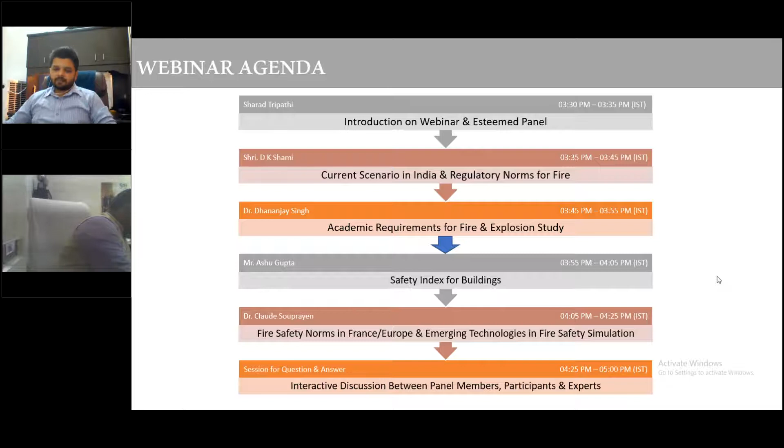For the last 2 years, I had been spending my time mostly in India, for one reason. And why I'm talking about this is the genesis of this webinar series also. We have been operating in China for the last 6-7 years, and we found that 3 years ago Chinese put an ultimatum to us that we should do development in China rather than working out of France or from India. And that was a kind of click, because I realized it's a pity that in India we are not putting emphasis on design.

Design is important not only for equipment, but also from a fire point of view, designing the building, designing the equipment, designing the safety. Depending on things which are coming from US, Norway, France, etc. really has no meaning. Things are usually 10 to 15 years behind the time. And if we really want to at least equal the Chinese, we have to adopt the same attitude, that self-dependence and independence should not be limited to make in India only.

It should first be designed in India, then only we can beat the Chinese and everyone else. So this webinar series is devoted not to the software, not to the applications, but to the technology, to the professors, to the students. We would like to engage them into new developments, into new research. Unfortunately, it is not going on at all in India.

Go to any IIT, you'll see that the numerical technology professors are practically absent. Everyone will talk of applications using the tools which are developed in US and elsewhere, but there is no motivation, no impetus, nothing is given by the industry.

So this webinar series was started essentially to bring the industry, to bring the students, and to bring the faculty on board, including Fluidyn. Right now we are working with French universities and academic institutions. We are financing PhDs. We would like to do the same thing in India.

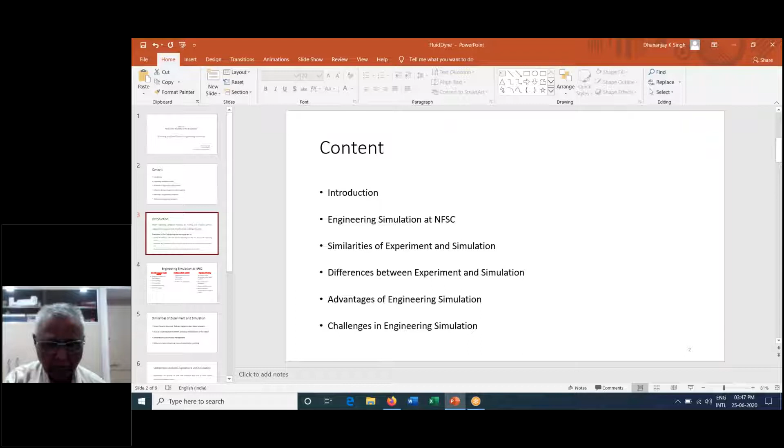Differences between experiment and simulation, advantages of engineering simulation, and the challenges which are present. My main focus is,

Yes. Now it is okay. Yeah. It is okay. Yeah. Please go ahead, Dr. Dhananjay.

So modern engineering workplaces commonly use modeling and simulation practices. Basically, here I am talking about the industry. Industries most of the time use computational tools for their analysis and design of systems.

For graduating engineers, NFSC mainly focuses on developing the techniques and skills of modern engineering by concentrating on identifying the problem, explaining what the problem consists of, and how they can apply the tools available to them to solve those problems. So basically, our main focus is on three things: identify, explain, and apply.

At NFSC, for engineering simulation, we have subjects like numerical methods for fire engineers, fire modeling, fire dynamics, structural fire safety, and fire risk analysis. These are the main core subjects which we are teaching here. Apart from that, NFSC has developed computational labs having 30 personal computers along with one workstation. NFSC has also purchased some software in which the students are given training.

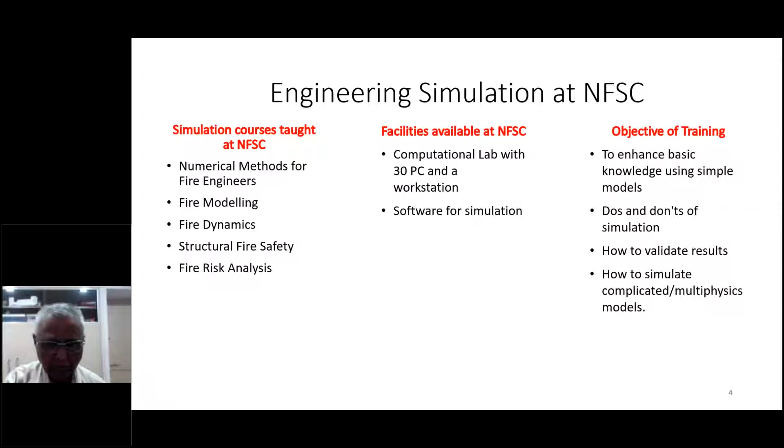Here multi-physics models means different types of problems, for example, an acoustic blast and how it is going to impact the structure. All those types of problems come under multi-physics models. Then the question arises, what is the similarity between experiment and simulation? Whatever results we get from the mathematical simulation, we can also get the same results from the experiment.

However, simulation we can do on computers, whereas experiments require a lot of facilities. Earlier, when computers were not developed, people relied on experiments. Now as personal computers developed and computing facilities were enhanced, people slowly shifted to simulation, and over the past decades, people have developed a lot of confidence in simulation.

So the first point is both experiment and simulation share the same structure, meaning both of them are in the same line. In this, we can also control the environment. For doing any experiment, we have to control the environment. Certain experiments require strict environmental control so that the results will be error free. The same thing can be done in mathematical modeling. Experiments and simulations are bound to have some error, so proper error management technique is also similar between the two.

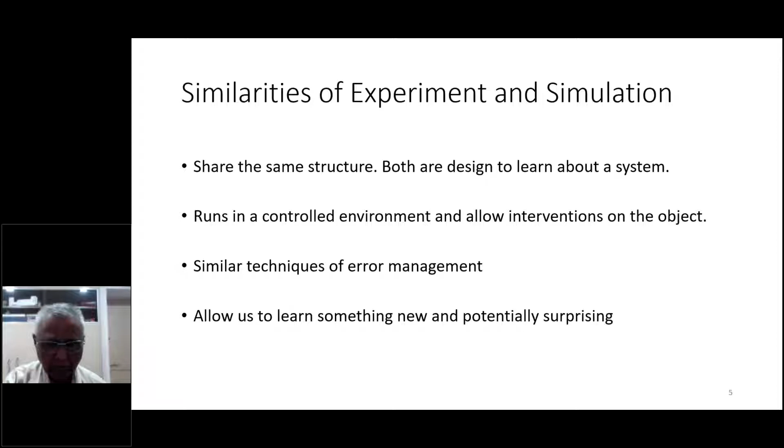We can also find some new or potentially surprising theory by using experiment and simulation. Then there are some differences between experiment and simulation. Experiments can provide us new empirical data, where computer simulation fails, because whatever computer simulations we do are backed by experiments so that we can match those results. But if you want to find new empirical data, in some cases computer simulation cannot help you in finding the empirical relationship.

Some experiments operate directly on the target system. For example, if you are testing a structural member, our target is to identify the fire resistance. So some experiments can directly act on the target system.

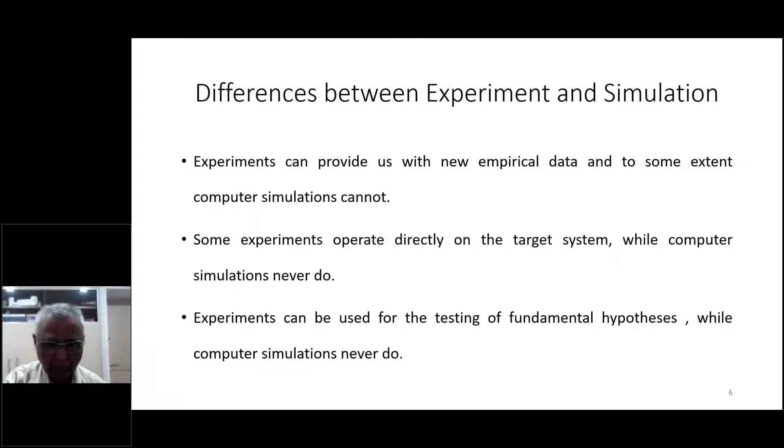Some computer models never do so. Experiments can be used for testing the fundamental hypothesis, whereas computer simulations never do.

Advantages of engineering simulation: it provides feedback while designing and analyzing the real world system. So before going for actual manufacturing of the particular structure or any system, we can do the analysis and design, and if we are confident that this is going to work, we can carry on with the design. So this is also a cost effective measure, which is the main advantage of using engineering simulation. It also permits the designer to solve a problem at different levels of abstraction.

In this, we can change the input data. We can see how the results are going to change. So basically, we call it the sensitivity study. Then simulation can also be used as an effective means for teaching or demonstrating the concept to the students.

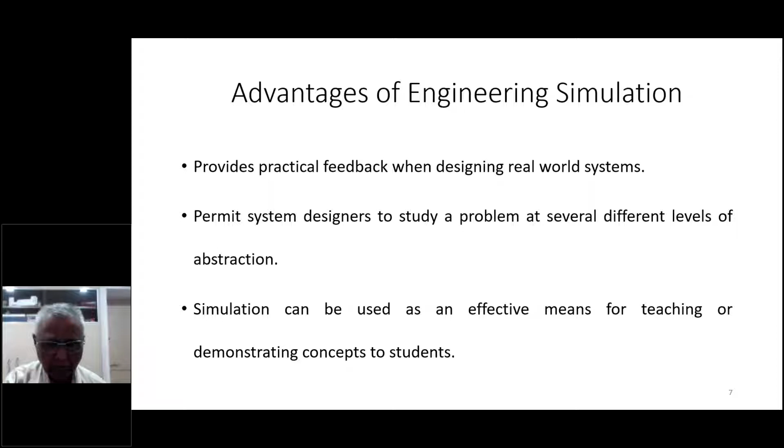The challenges in engineering simulation: it requires high expertise, because it's just like a double-edged sword. It is a boon to us also simultaneously. If it is used in the wrong way, it is going to give you a lot of problems, because the results will be meaningless, and ultimately at the end you will achieve a failure. So expertise is required to handle this engineering simulation.

Apart from that, high computing facilities are required, because if you want to analyze any dynamic system, it can take weeks also. So without high configuration computers, it is really difficult to get the solution. But we are fortunate that nowadays some companies are there who can share their servers at a small cost. So that is also an option which is available to us.

And sometimes simulation might not be realistic or reliable. So while using this engineering simulation, we have to be very cautious and always have a question mark on our results, so that wrong or meaningless results can be effectively filtered out, and at the end we'll get good and meaningful results, so that our end product or end output is error free.

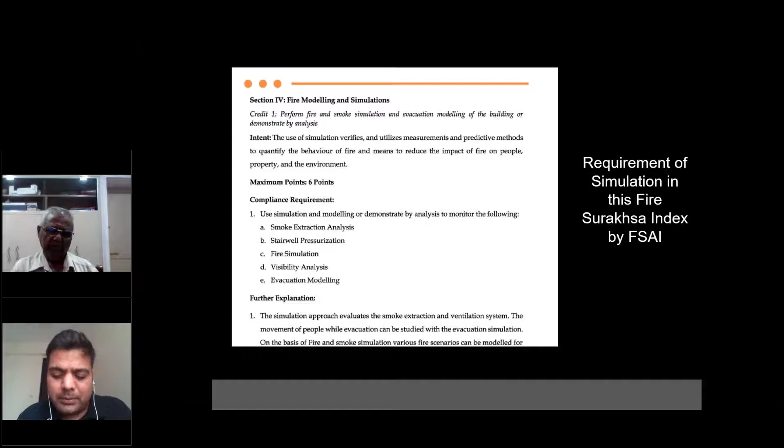They do fire evacuation modeling and fire smoke extraction analysis during the design concept. And if we use those concepts, it definitely adds a lot of value. So I'll give you some of the projects in India which I was involved in. Evacuation is very, very important.

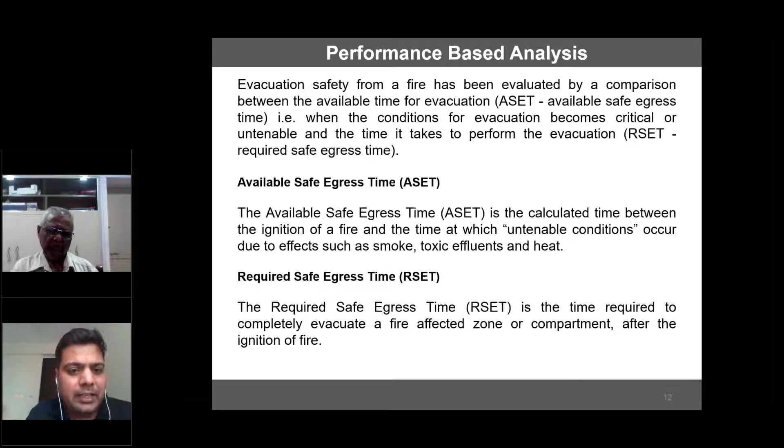When we say performance-based analysis, we have to calculate the ASET and RSET times, the available safe egress time and the required safe egress time. So what does that mean? This graph shows how the fire ignites, how we detect it, when the alarm is raised, and the recognition time, response time, and travel time. Then some margin of safety.

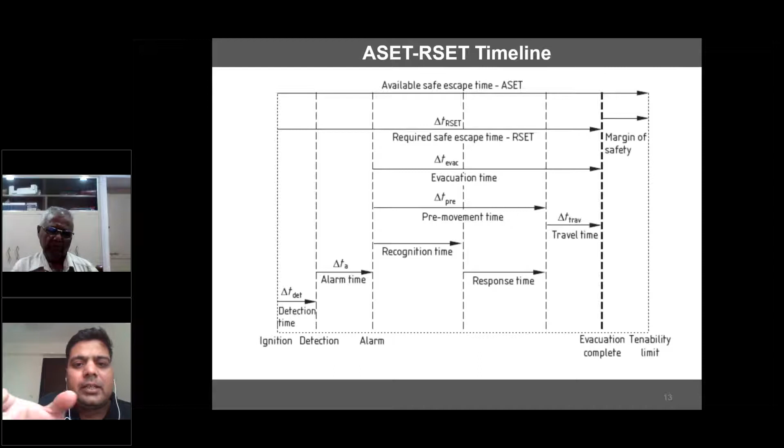The entire time is called the available safe escape time, ASET. And RSET, before the margin of safety, is the time to evacuate or escape the building, the required safe escape time. I have seen these kinds of studies proven because people applied the performance approach.

They look at visibility and temperature; of course, visibility is more important. If visibility drops below 10 meters, it is not safe, and we need to evacuate by that time. For this safe egress time, in some of the analysis we have done in some projects, the time coming out is 540.

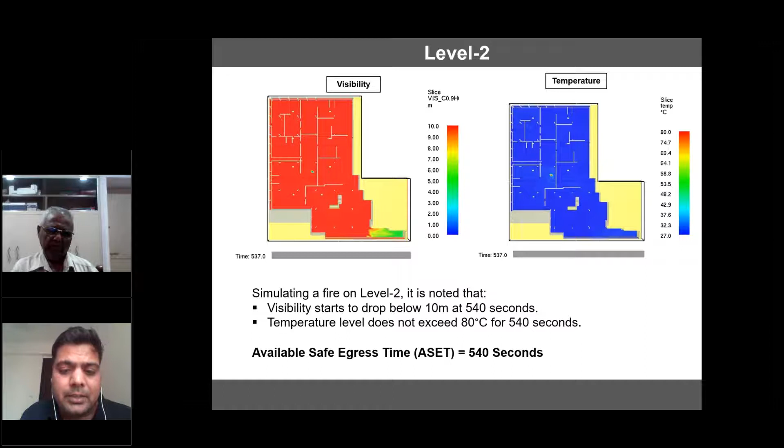This is the same project, level 1 and level 2 of the building, and we calculated that level 1 should be escaped in 780 seconds. We calculated this time with the help of simulation. There is nothing in the prescriptive approach which directly says this much time is required to evacuate. Generally we say some 10 or 12 minutes.

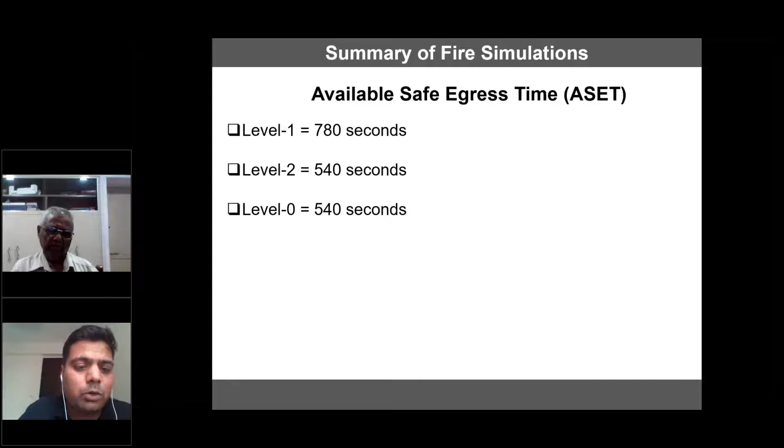But this exact number comes with the help of the simulation approach, the performance approach, because different kinds of building materials come up, affecting how the smoke will flow. Similarly, evacuation analysis is very, very important, because now we have several airports coming in India, several hospitals, and high-rise buildings are coming.

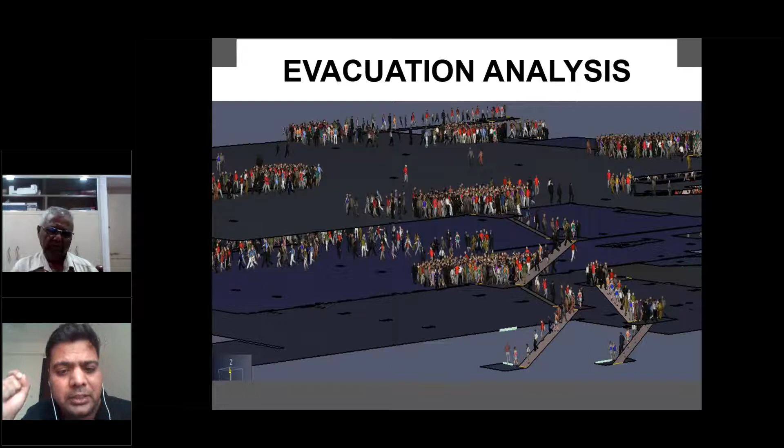Earlier we were making 10 floor, 12 floor buildings. Now we are talking about 100 floor or more than 100 floor buildings, and how people will evacuate if a fire happens. If we do this kind of analysis during the design of the project, it adds up a lot of value, which we have calculated.

So this is actually the prescriptive approach. I just want to explain the prescriptive and the performance approach. In the prescriptive approach, we have the National Building Code 2016 version, which is the latest one. And for performance, whatever we do, we follow the NFPA 101 concept. They have a requirement of total occupancy, and most of the time our fire officer always says we need to meet these numbers.

This is the maximum occupancy we can reach. But sometimes the client wants the occupancy to be higher. In that case, how can I prove that? This proof can happen because of fire evacuation modeling.

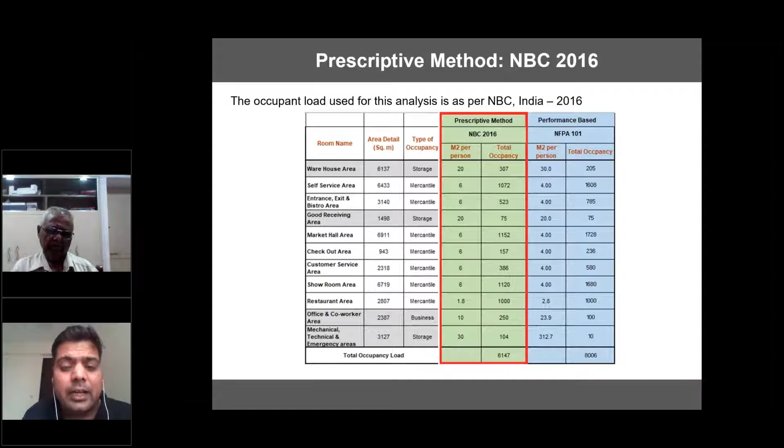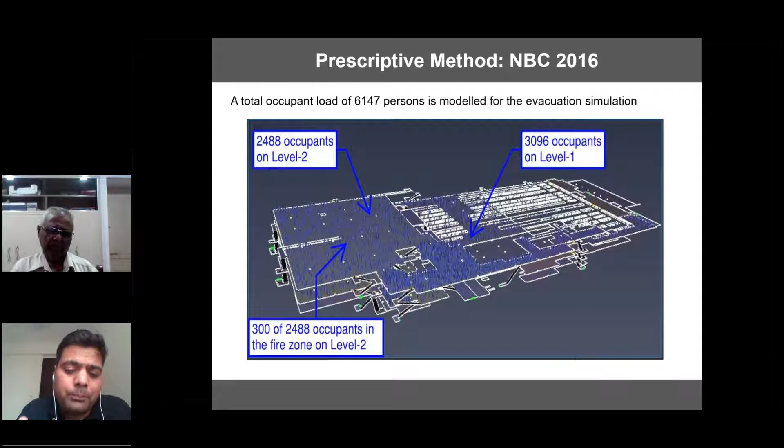We have seen this in one of the projects, an India project, in which as per the requirement of NBC, they can involve only 6,147 persons as per the requirement and evacuation time. So we calculated both the prescriptive and performance methods, and we calculated the evacuation time in that. Total occupancy, total occupant was 6,147 in the building.

This is the video, I'm not running it right now, but we calculated that if we go with the prescriptive method with NBC 2016, the 780 second is the maximum available safe egress time, but the required time was 340, 363, 375 seconds for the 6,000 people.

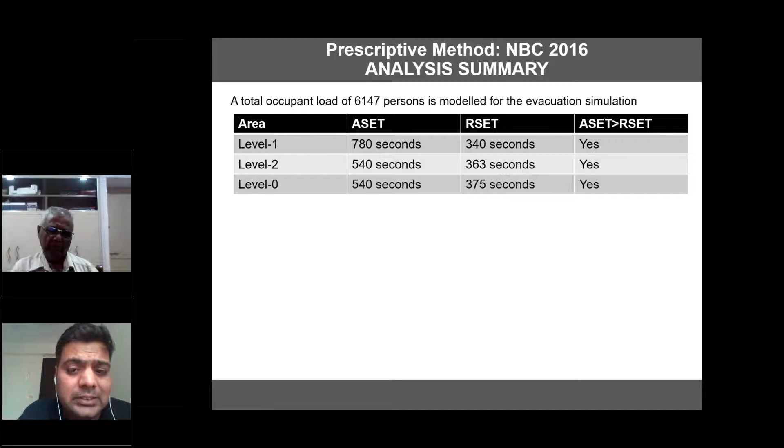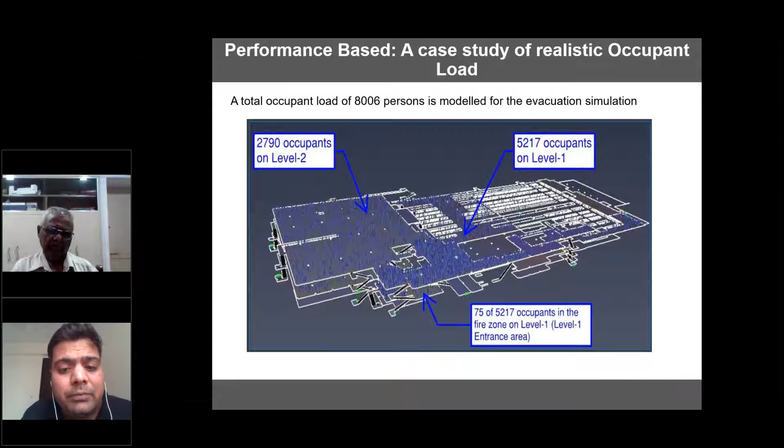And the client wants to increase this number. With the performance approach, if we go with that, the number can be 8,000 people. We did it with 8,000 people, so 8,000 people was involved, and we did the same analysis.

The maximum time was the same, but the RSET was 466, and it was coming in between the available time. We proved to the fire officer that this is happening, sir. Even with 8,000 people, we have enough time to evacuate. By the prescriptive method, there is no way to prove that, but with the performance approach, there is a way to prove that, and people are doing it.

But still in India, there is no provision for the performance approach. Being a building expert, I do similar work in the energy sector also. Ten years back, energy simulation was not a concept in India. People were always talking about the material they needed to procure, but the concept has changed. Now people understand the value of simulation during the design process.

We saved a lot of money, but here the cost is not money, it is the cost of human life, because if we save one life, it gives a lot of value to the simulation. My presentation was just a basic cover, but FSAI, the Fire and Security Association, is doing a lot of effort to develop this, and we want people in this area to please come forward as volunteers, because we are trying to develop something for the government so that if this follows, it will definitely become part of the building regulation. Thank you so much for the time.

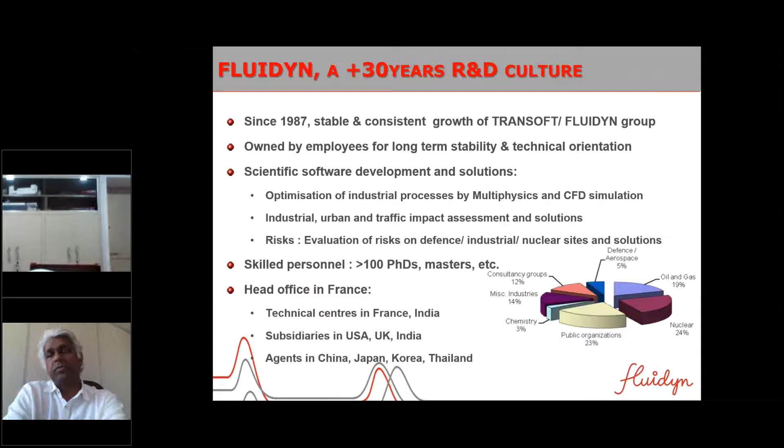And the other activity is about consultancy jobs, and this is where a large part of expertise is built, always and very often, with respect to regulations requirements for industries.

I have a few slides of introduction just to overview and complement what has been expressed in terms of fire activities and fire safety applied to public buildings and malls and so on. I will focus in this presentation on industries, which is slightly different, even though most of the scenarios look similar. Objectives for smoke evacuation, temperature load are similar. The responses are not exactly the same.

In this slide, you can see basically what are the phenomena and effects at play and what we are looking for when producing the risk assessment for fires. Most fires, or all fires, are combustion of gases, gas mixture. Indeed, even solid fires and liquid fires are starting with decomposition, fusion, evaporation, pyrolysis, which produces the gases, and flames is basically a gas phase combustion system.

What we'll be looking at more specifically is thermal fluxes on the environment, looking for damages, losses on structures and assets, injury to people, both on-site and off-site, when talking about industries. The other issues, of course, are toxic byproducts from the combustion, loss of visibility, and ultimately pollution of mainly water and soils via the wastewater.

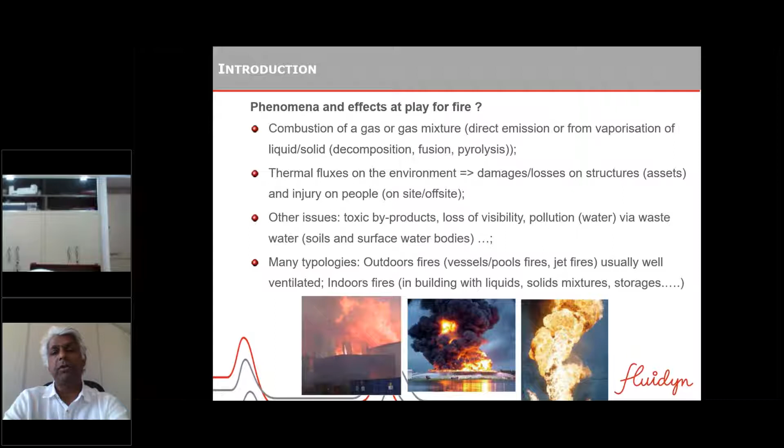If we look at short range, when making modeling and assessing the power, which is the very first ingredient for the assessment of the risk, most of the power is from heat transfer, radiative and convection, from burned gases and soot. Everything is at high temperature, including burning char, which can be inside the smoke. Radiation at short range means few meters away from the source.

And this is important for propagation of the fire. One usual issue about fire is assessing which part goes to convection, which might reach long-range distances, and which part goes to radiation. The sketch you can see here is basically the typical shape and zones in the fires, and the way the energy from the fires goes outside from the source terms and the fire region. You also have a few examples of the order of magnitude of temperature which are reached at the fire short-range domain.

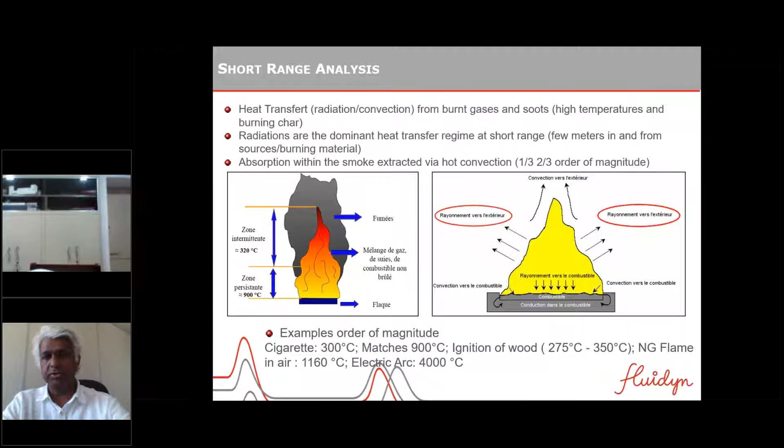Now, looking at the regulations and the several aspects with respect to the risk assessment, evacuation is of course something for people, specifically for places where the general public is operating and located.

But in industries and in the design of buildings and infrastructure, resistance to fire is something which is important. And from the regulation point of view, there are classifications of structures and materials with the level of resistance.

In France and Europe, 3 letters characterize the resistance to fire: R, E, and I, for resistance, air tightness, and insulation. The second item is about reaction to fire.

It comes to see whether some materials have the potential to feed the fire during degradation or decomposition, and to enhance the development and propagation of the fire.

So it can be droplets, can be debris, and the European classification, you can see examples given here, also includes indices for smoke opacity, and this potential production of droplets and debris from the decomposition of the materials. So you see examples of classification: SF, PF, CF for the materials.

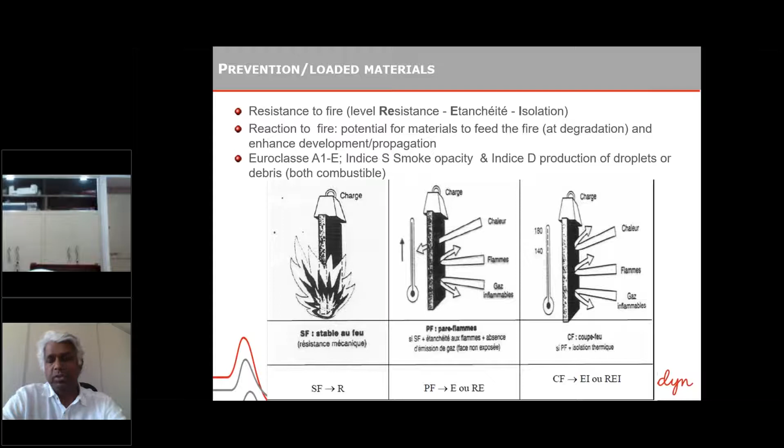When talking about regulation, the protection of people and structures all comes down to thermal effects, both for continuous long duration exposure, which is different from explosion, where you have short duration pressure blast and pressure effects on people, assets, and structure. For fires, basically you also have orders of magnitude of fluxes and typical effects that can be produced by those fluxes.

The yellow ones are the thresholds for effects in kilowatts per square meter. For irreversible effect, which is 3 kilowatts per square meter, it is for fires of duration larger than 1 to 2 minutes.

The second one is 5 kilowatts per square meter for the first lethal effect, again same duration for fires. 8 kilowatts per square meter is for significant lethal effects.

And you also have ideas about domino effects and propagation at 8 kilowatts per square meter. You have spontaneous combustion of woods and paints, and in some situations, propagation to other hazardous reservoir materials which are on the assets.

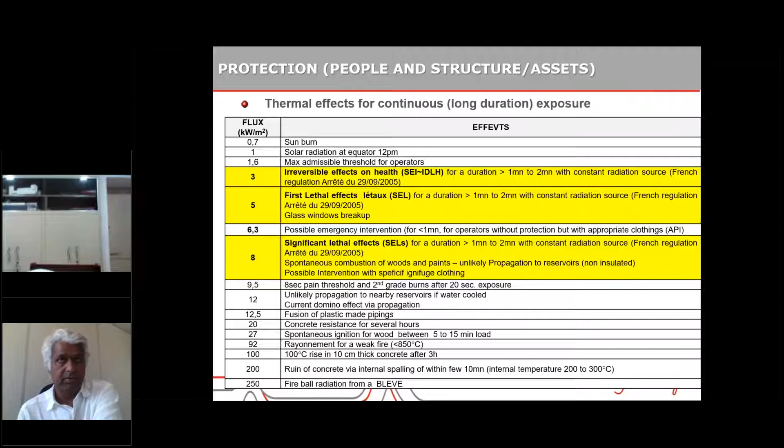So based on those regulations, I should emphasize that in France, there are 2 bodies of regulations. One which is under the control and changing and improvement by the French Ministry of Environment, which is handling both the industries and energy.

And the regulations are based on the classification of activities. ICPE means classified installations, Seveso, large industrial sites with major hazardous risk, and nuclear. And you can have a few examples of classification.

1510 is for warehouses. The other one is for flammable reservoirs and flammable liquids. So it amounts to the analysis of oil and gas depots and farms.

The other one is for waste and recycling, where you have accumulation and storage, including processes of waste, where paper, paperboard, wood, electrical equipment can be located.

So for those kinds of regulations for industries, they impose strict application for design, inspection, and of course risk analysis, for prevention, protection, and in the risk analysis and QRA, quantitative risk assessment, looking for consequence modeling for fire, for propagation, for assets and structural collapse, for operators' safety and evacuations, and ultimately for environmental impact, pollution, smoke, and so on.

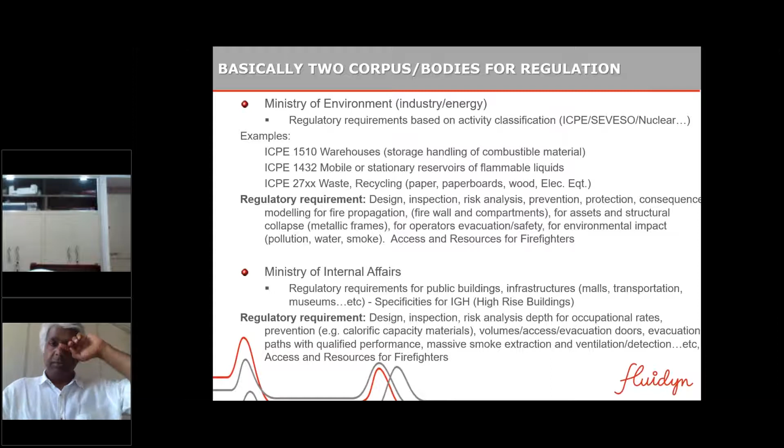So the other body is about the Ministry of Internal Affairs. It's handling mainly public buildings, infrastructure welcoming the general public, malls, transportation infrastructure, museums, and so on, with very specific requirements for immeubles de grande hauteur, which are high-rise buildings, where the requirements are much more strict for structural analysis, for evacuations, ventilation, massive smoke extraction.

And in that case, the regulation requirement is about design, inspection, risk analysis for complexity depending on the occupational rates, for the number of people to be evacuated in short durations.

Prevention, looking for removing any high calorific capacity material that can produce high energy fires. Design for the volumes, for the access and evacuation doors, for dimensions, path, and qualified performance, meaning that for various fire scenarios, the performance of the systems, both for smoke evacuation and for people evacuation, has to be qualified.

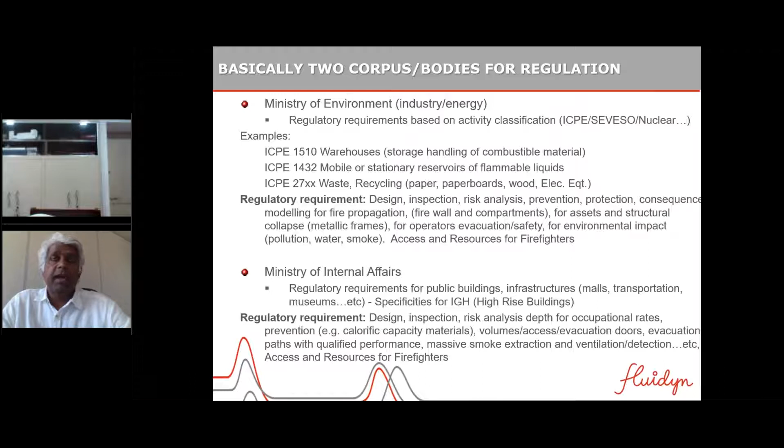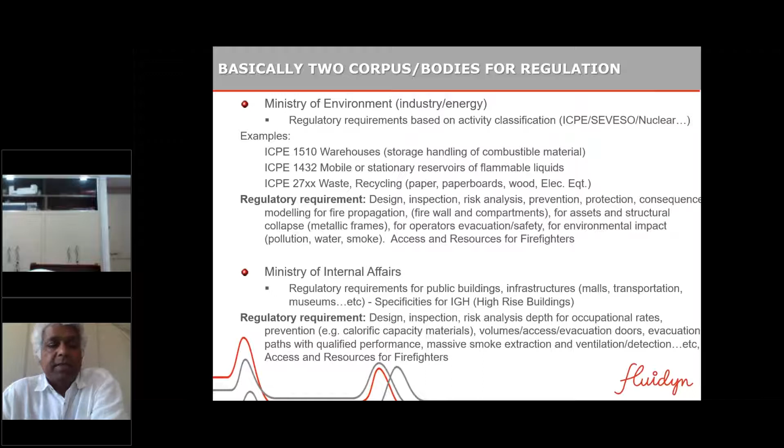Again, in these requirements for infrastructure and public buildings, there is a need for access and resources for firefighters. So at Fluidyn, we try to develop approaches and specific software to propose solutions with increasing complexities. Some are for dimensioning designs, others for more complex situations like transient fire propagation and evacuation issues. So Ventfire is one of the solutions developed in India by our Bangalore team for assessing transient cases.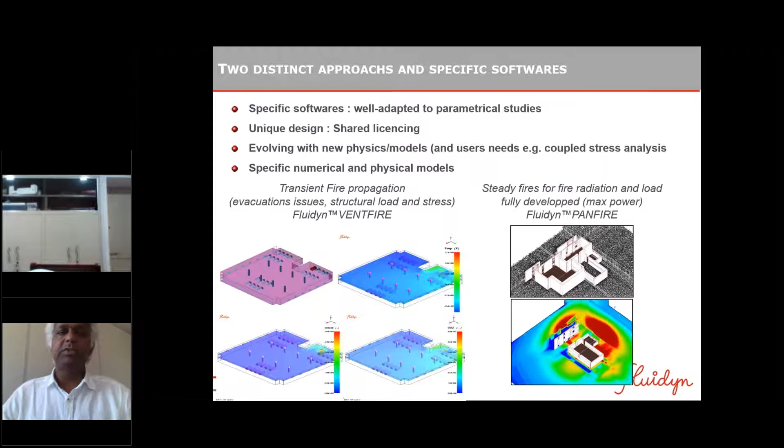So this quick design engineering solution is very helpful to assess the layout of the plant and to see whether various mitigations might be efficient to reduce the impact.

This application, PanFire, uses solid flame models, which basically rely on empirical correlations for the flame height of the fire. Two important parameters are the flame geometry and flame emissive power, which is a very robust way to describe things like pool fires, jet fires, and so on.

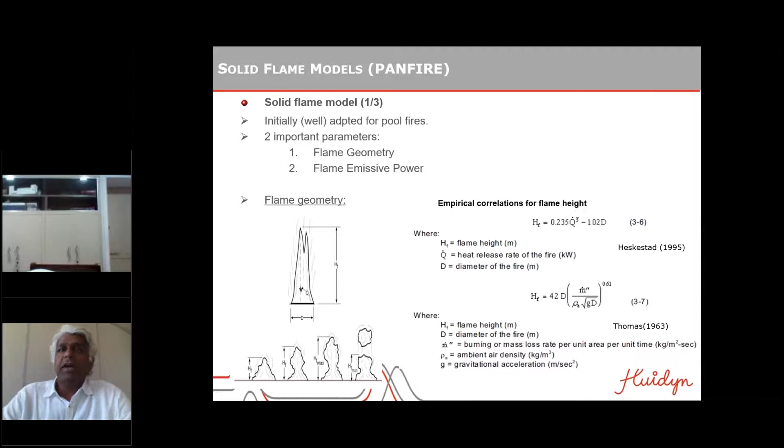And when looking at more complex fire cases, for example for storage, it also takes into account how the storage is assembled. You see on the sketch here an example of combustible material assemblies, and the combustion rates, which is one of the first important parameters for solid flame models, will also depend on the assembly of that storage.

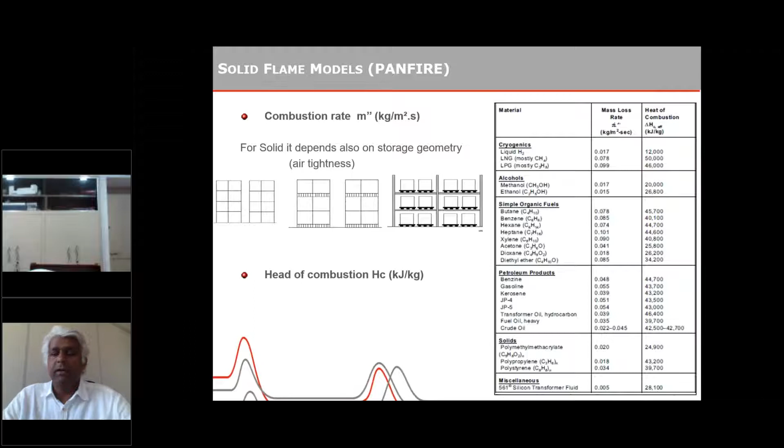The second parameter is the heat of combustion and the radiation at the flame. So the flame emissive power in solid flame models relies basically on estimates from experimental data for various burning materials. Based on the surface heat release rate, we can estimate the solid flame model.

In this specific tool, Fluidyn PanFire, we can estimate the surface heat radiation part of the combustion power. You have an example here of typical heat release rates for various burning materials.

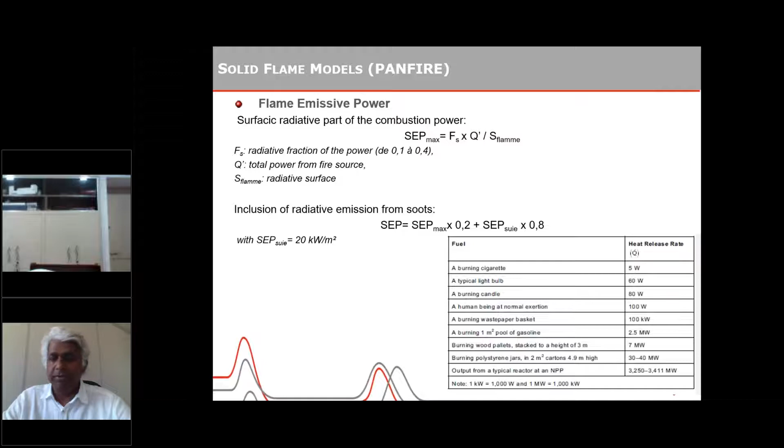Can you see this presentation? This conference will now be recorded. Yeah Claude, continue. Okay, alright. Please do not record because there are interruptions. We'll send you the slides later. Claude, you should close it in the next 10 minutes, not more.

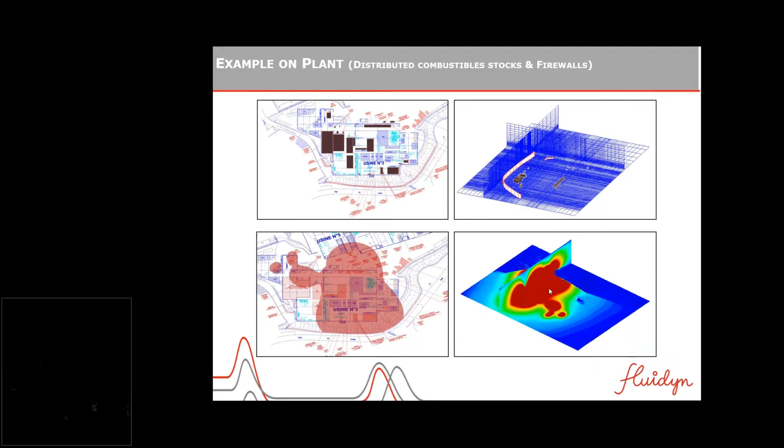In addition, the materials are defined in different classes.

There is also compressed gases being stored, and inside the buildings we are using these compressed gases, the liquefied gases, and a lot of hazardous materials.

So the way we go about it is first laying out the safety distances so that we are segregating the flame proof and non-flame proof areas. And while the plants are being built, the process is designed in such a way that we identify where the hazardous operations are, and certain instrumentation is built in so that it takes care of this.

But still, we have not had any experience of any explosions, except one where there was a dust explosion, but we had designed it in such a way that in case of that dust explosion, it should be vented outside, and it worked that way.

And then sometimes we come across experiences where we have to design pressure vessels where hydrogenation is taking place, and these hydrogenators, if the operators make any mistake, you can have an explosion of a pressure vessel inside a building. So what we do, as a standard practice, is develop the location of the pressure vessel in such a way that the explosion can go upward and outward and not bring down the building.

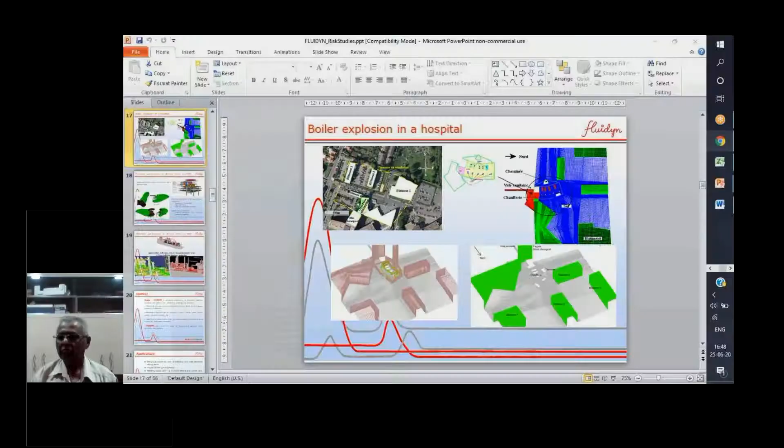Thank you very much. Shamiji, there is another question from Larsen and Toubro, Mr. Bashram Govindam, which is of a similar nature, on deflagration. Mr. Govindam, are you there? Yes, sir. So can I ask my question? Yes, please go ahead.

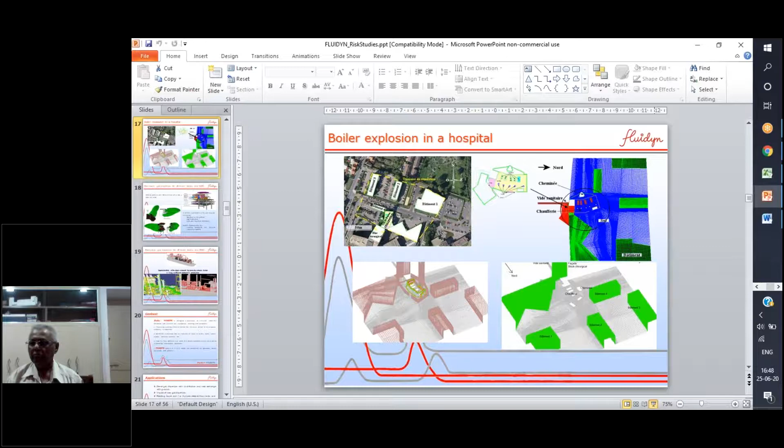So we were in a project where we had to evaluate what would be the effect of deflagration of a low hydrocarbon in air, and whether we should design our equipment for such a high pressure which comes after the explosion. We built a 1D model, but my question is regarding the 3D simulation models that have been done using very realistic simulations like CFD, the very detailed model that you have shown.

How does it differ from the usual 1D graph which is obtained from literature, and how does it compare with that? Is there any substantial difference in the pressure which we get, because our values are very closely correlating with NFPA values? So I'm just asking how different that could be.

And my second question regarding the same thing is, would it be possible to design a very complex geometry in the software? I think it should be, but for deflagration, would it be possible for a particular composition to have such a small transient variation in Fluidyn? So those are my two questions.

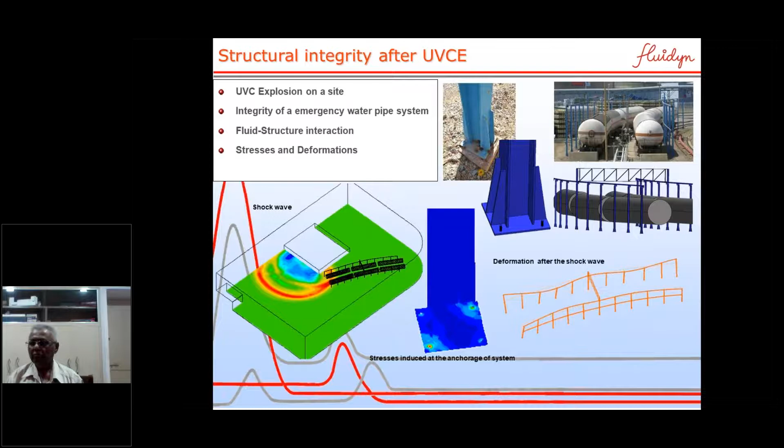Okay, I can answer the questions about the comparisons. 1D or 2D models are usually applying TNT equivalent curves based on the initial energy which is available, whatever the dimension of the vessels, the dimension of the cloud, or the property of the explosive material. It gives a value as a function of distance, how the pressure is decreasing.

And of course, those 1D or 2D models are very good first screening tools, but they are not using at all the exact design of the plant. So it is flat terrain without obstacles, without bouncing of the pressure and so on. And therefore, it is quite difficult to assess which one to compare, in fact.

But of course, the better you describe the site, the better you describe the process of the explosion itself, either by solving the turbulence and combustion models for the deflagration of a gas, or the exact geometry of the reservoir for a pneumatic explosion, for example, it will always be a much better description of the way the pressure is propagating away, bouncing and being reflected, and how the mitigation can operate and what the performance of the mitigation systems is.

So somehow 1D or 2D models which are using abacus or analytical formulations are very useful for very first screening. But if you look at the distance at risk for even a very small reservoir, you'll end up with a very long distance, which is quite annoying in terms of implementation of the layout of the plant, and also may refer to far too conservative distance regulations to build nearby buildings, nearby industries, and so on.

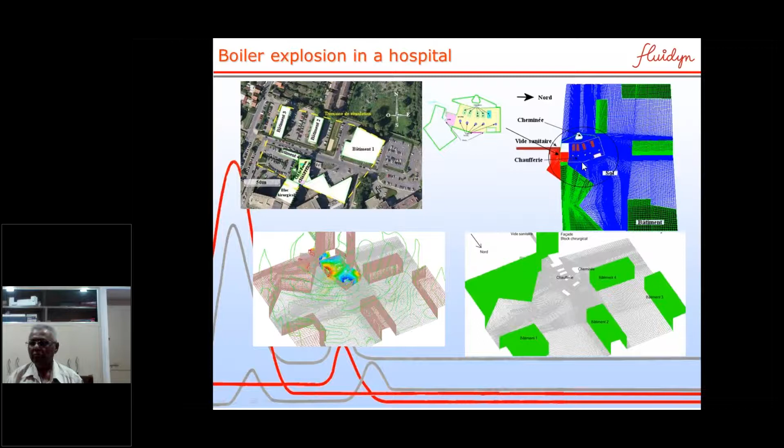fueled systems, and the design helps to tell what the surface for the vent holes should be. Are they good enough? In case the geometry is not allowing analytical or empirical formulations to be employed. And also it produces the exact distance at risk outside.

I would also like to point out that very often most of the designs are done keeping deflagration in mind, subsonic explosion. But when the explosion is confined, it may turn into detonation, which is much more deadly. Things like Buncefield also happened because of the accumulation of droplets, aerosol in the air.

So subsonic explosion, making estimations like 120 millibars as the maximum pressure, etc., is really not valid. In most cases, for the tools which were using that kind of number, in real life explosions the pressures reached were much higher.

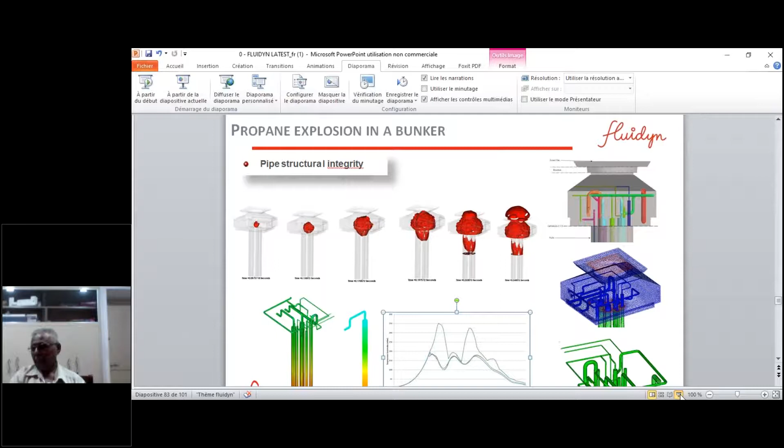Mainly, it was a discussion of the design parameters and the design basis to be inducted during the design stage itself in the building structures. My question was, we are in the petrochemical business, so this simulation or early detection with respect to some release sources, are you working on that? That was my question.

I think I'll take that question partially before handing it over to my colleagues. We started working on early detection for terrorist attacks in early 2000. For almost 10-15 years, it was under wraps because of its sensitive nature. Those things were not allowed, you see. And that is where designing and in-house development in the country is very important. Mr. Ghosh, you would have been already using these tools some 15 years ago if these things were being developed in our IITs.

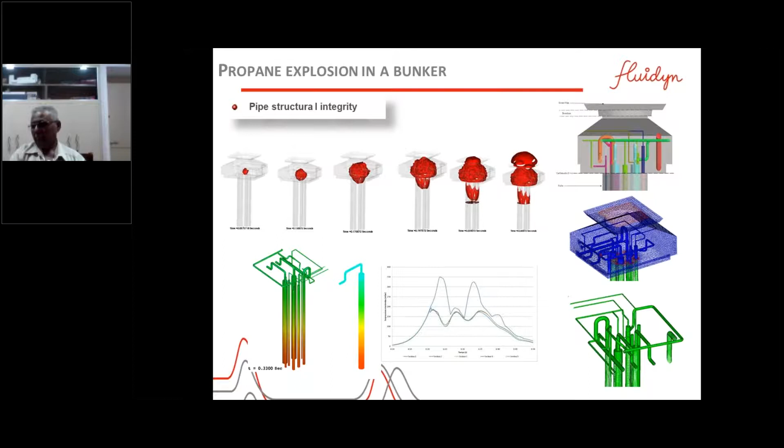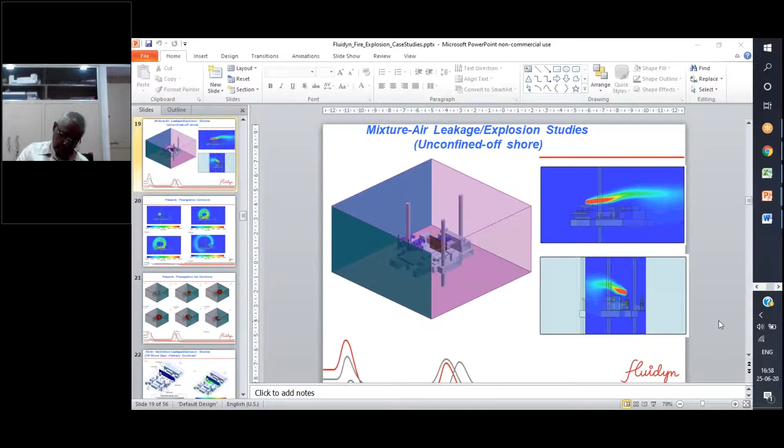So of course, when you have no leaks, there is no need for any action. But as soon as those maps are pointing to some leak locations, there is room for action, and this avoids the accumulation of flammable material on the plant, at the process, or outdoors, outside the property limits.

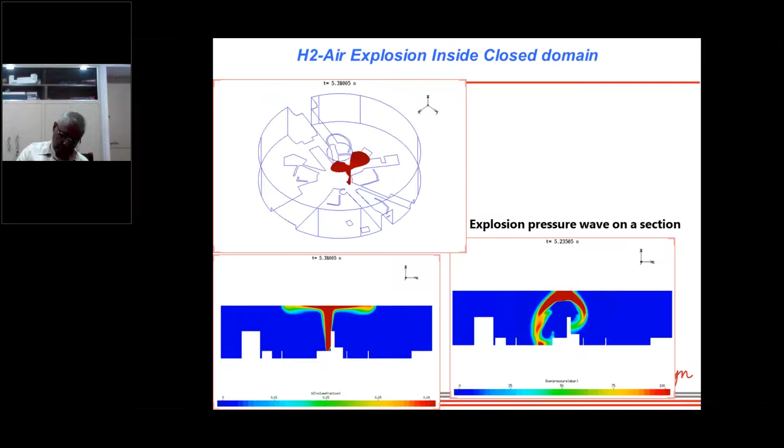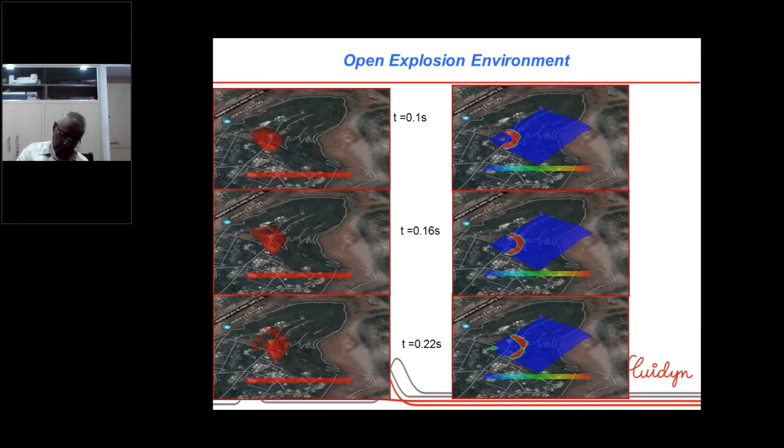Dr. Chandan Ghosh, wow, he is a professor who introduced me to Dr. Sharad. Thank you, Dr. Chandan, for all your good work. And I think since then we are progressing ahead. And you are in fact the person who started the ball rolling in India, and I tried to help you out. So thank you for joining with us.

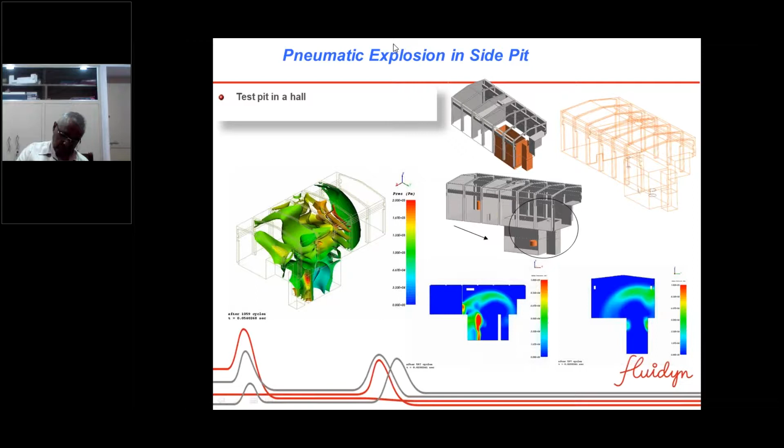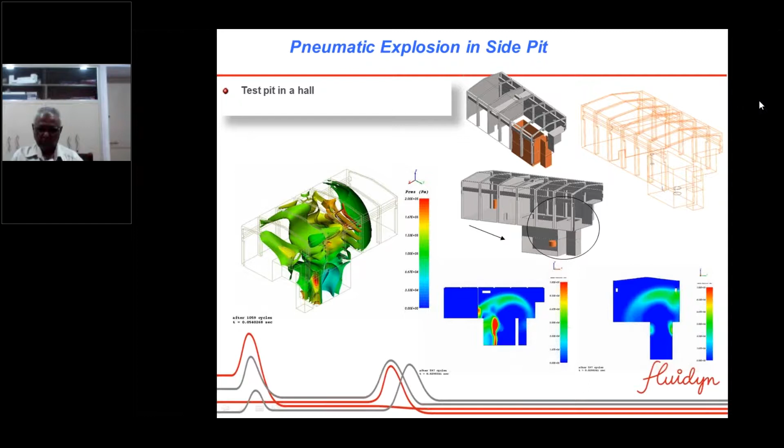I don't have much question other than only one. This is a challenge to all the technocrats who are attending this session: how and when you will give me the pocket-friendly version of your technology, so that I, as a fire advisor, can ask all my firefighters to put it inside their computer and do the rest of the work before issuing the NOC.

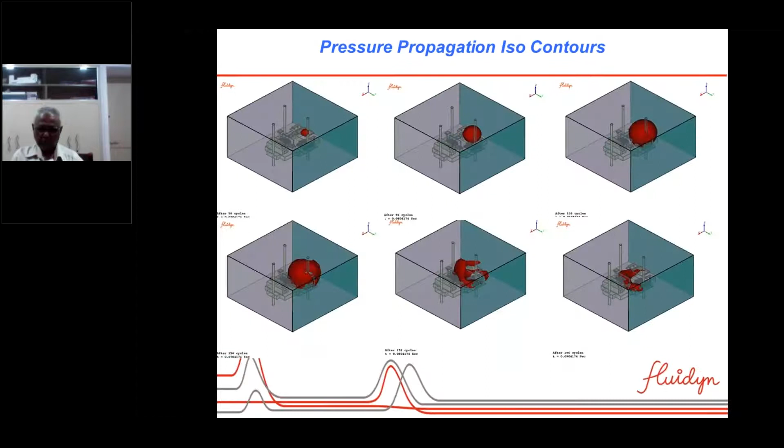So my question, since Sharad, you are there, I know you. I just want to know when you will provide us the pocket-friendly version of your rich technology, so that each of my firemen can install it in his own computer without depending much on the cost part of it. I mean, a bigger server, or the continual upgradation of software or something like that. Sharad, over to you, please.

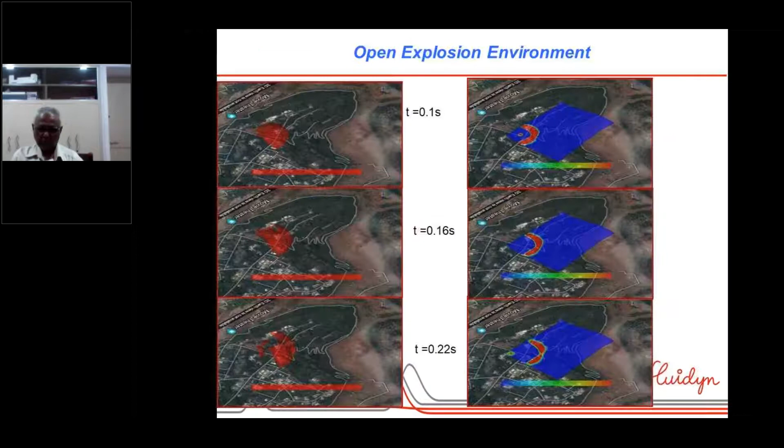Can you answer me? Swamiji, thank you very much, especially for attending and the encouraging words. In fact, you have taken the words out of my mouth. After 50 years of life here, all that I am looking for is that whatever is being developed in Europe should be developed in India. It should be at Indian cost. It should be done by Indian engineers who can earn a good living without having to go to the US and elsewhere.

If we start developing things in India, I'm sure, like the general IT industry, which was based on low-cost labor, it should be based on a high-cost, high-technology base, and we can export the same things to China and elsewhere. Our technology is being used by the Chinese. The Chinese are pressurizing us to do development there. We are not getting encouragement in India.

Your question about a pocket size limited to the money available in Indian pockets can be developed only if the Indian industry rises up to it, encourages the developments in Indian institutions, encourages the development in IITs, and stops looking for technology which is 10, 15 years old coming from the Western world.

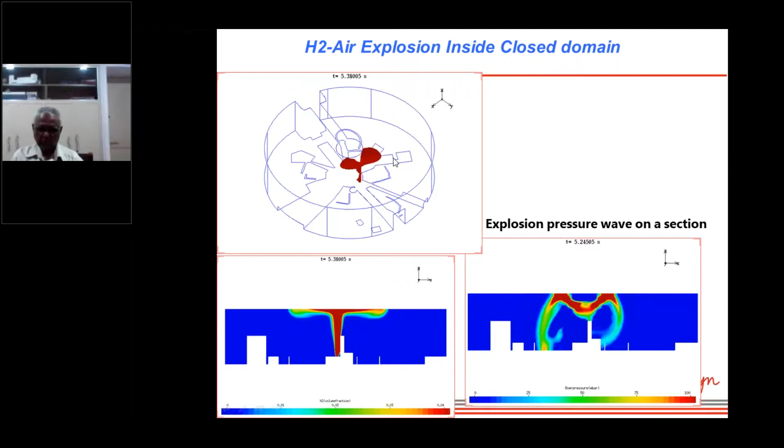So I would rather thank every one of you. It is very, very kind of you. I'm sure this kind of thing will go down to our young generation, and hopefully they will come forward and probably support our endeavor in future.

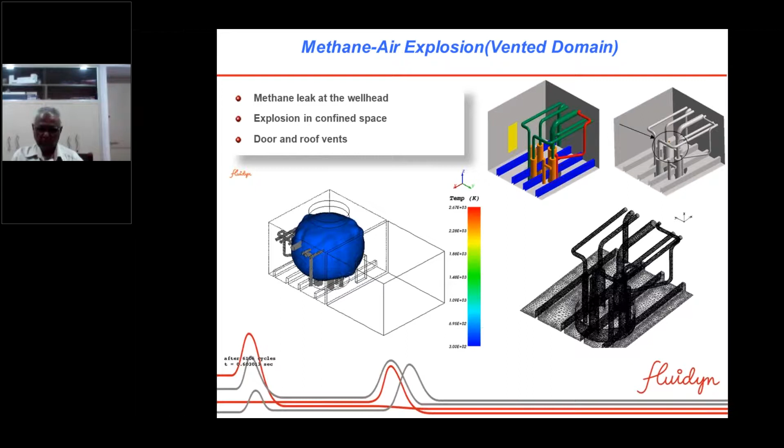I think we'll work on it. We are working on it. And cost is not the answer. The answer is in the technology, sir. We will do everything for that. Thank you, Dr. Dhananjay. Please take this as a challenge and try to encourage your boys to do something for us and use the available technology and come out with whatever is required for the country.

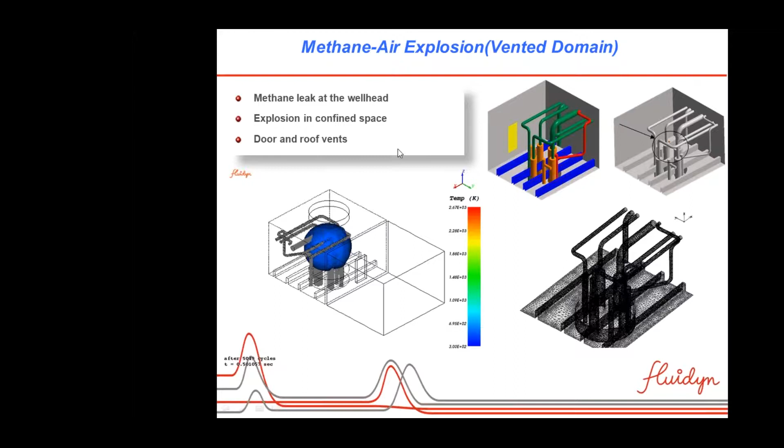So the other thing I would like to know from these eminent participants: since I have introduced this performance-based fire design in one of the courses being run by the IP University, I want a number of you volunteers who can teach this particular section of the syllabus with available experience. So they can forward their name to me through email, and probably, Mr. Sharad, I will take some help of your team, and through webinar or through the distance education method, I can introduce your eminent speakers to these participants of the IP University. We are always available, sir, whenever you want.

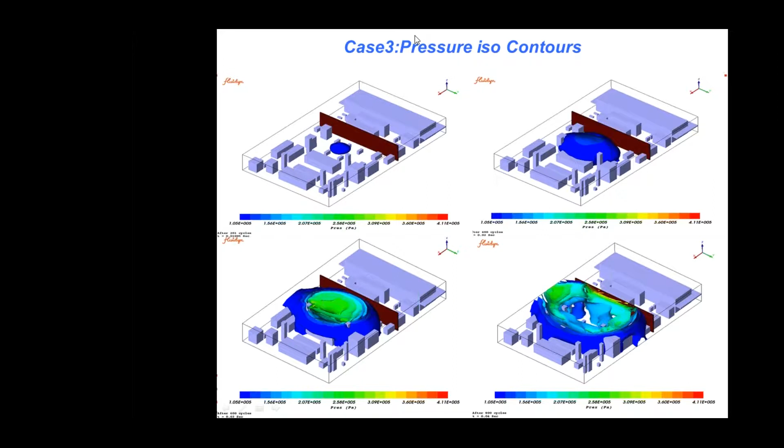Thank you. So these 2-3 things were in my mind. I don't know whether any one of my panelists would like to ask any question. Dr. Dhananjay, do you have any question? No, sir. Okay. Mr. Ashu, do you have any question? Mr. Ashu, are you there? He is not there actually. He left. Okay, fine. And Dr. Claude, do you have any questions? No, no question. Just ask people to send questions afterwards through the website or through the emails if they want more detail on the presentation.

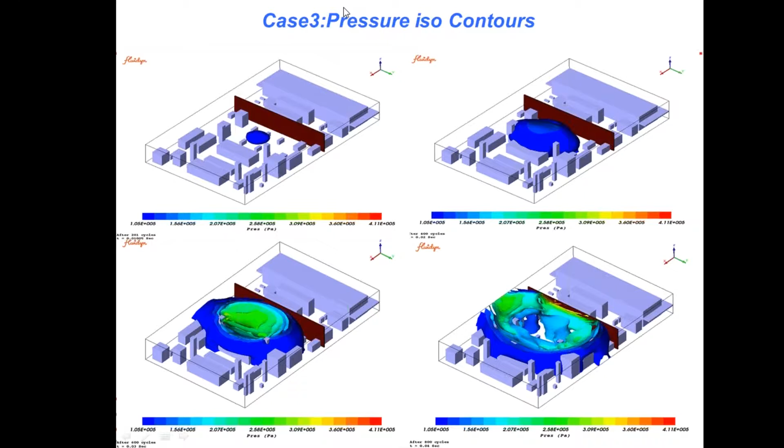Okay. Anyway, I would like to thank one and all for giving their valuable time and sharing their rich knowledge. Some of the questions will definitely help us in improving our codes and standards, like what Mr. Jeffrey asked from Mumbai. This will help me improve my own standards. And of course, the available technology supported by Mr. Sharath will help us in improving. Dr. Sharath, with these words, I will hand over the mic to you. From my side it is over. I would like to have more and more questions to improve the condition in my country.